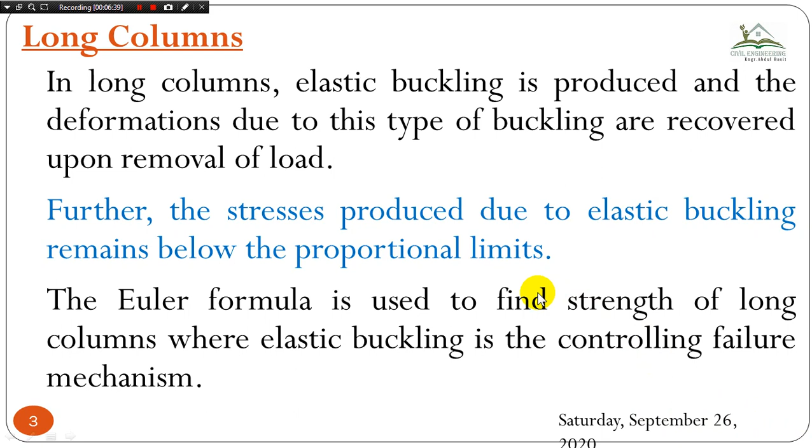Long columns are defined as those columns for which the slenderness ratio is greater than RC, as I've told you. And this is phi, the factor included to determine the compressive strength. Now short columns refer to columns having a slenderness ratio less than 20 to 30. There are zero buckling chances in short columns; only yield stress will govern.

In practice very few columns meet this condition. Normally very few columns will be short; they will usually be intermediate or long. For intermediate columns the slenderness ratio is above 30 up to 133. And long columns I've already explained.

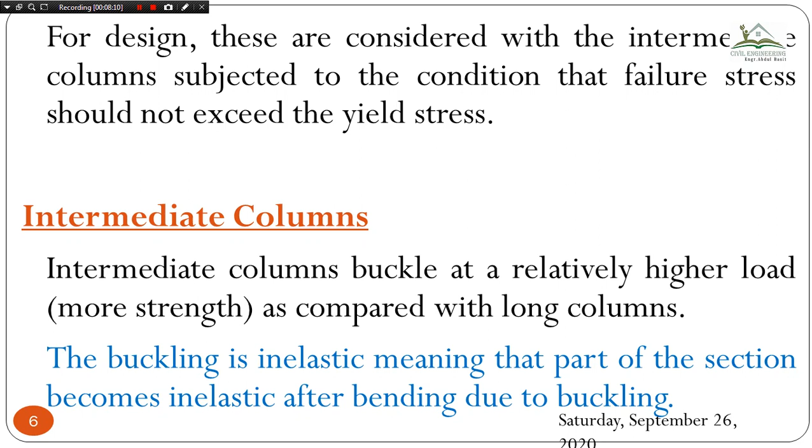Now coming to the column strength formula. We have already discussed the tensile strength, where phi t Tn was the design strength and Tn was equal to Fy into Ag. Similarly here is the same formula, just the variables changed. Instead of Tn we use Pn, for compressive load, the compressive nominal strength, and phi c is the strength reduction factor for the LRFD design method.

For the ASD design method, phi c is replaced with another factor of safety, omega c, and Pn will remain the same.

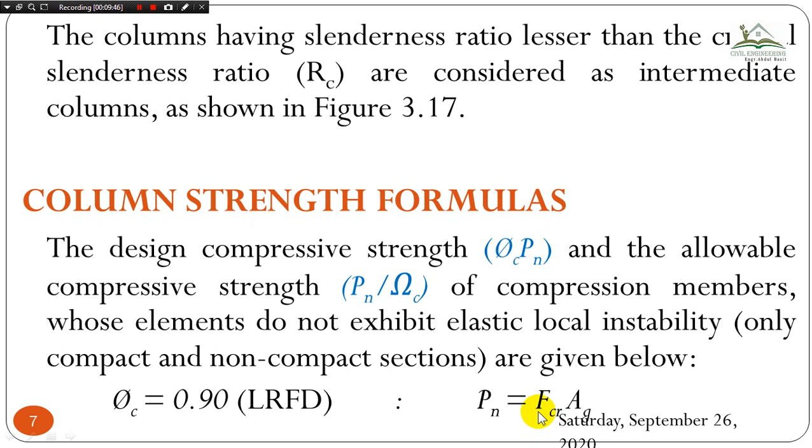Here omega is equal to 1.67 according to ASD, and Pn is equal to Fcr Ag, so Pn remains the same in both LRFD and ASD. F critical is the critical or ultimate compressive strength based on the limit state of flexural buckling, determined as under.

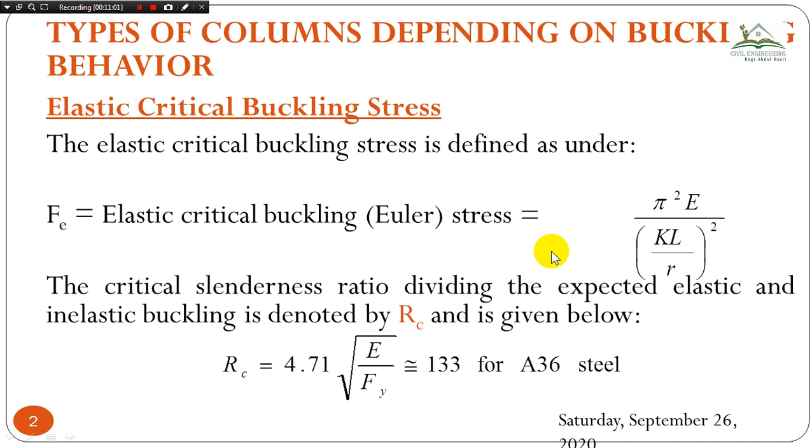How to determine this F critical.

So sometimes it will be equal to 0.877 Fe for elastic buckling, okay, and for inelastic buckling, or if there is no buckling, then we will use F critical equal to 0.658 to the power Fy divided by Fe, multiplied by Fy, okay.

All the values are given with you. So how to find out whether this buckling is elastic or inelastic? Here we have two conditions, okay. Either this condition will be acceptable for this calculation, or this condition will be satisfied. Similarly, either this condition will be satisfied or this condition will be satisfied, then this equation will be acceptable to you. So here it is.

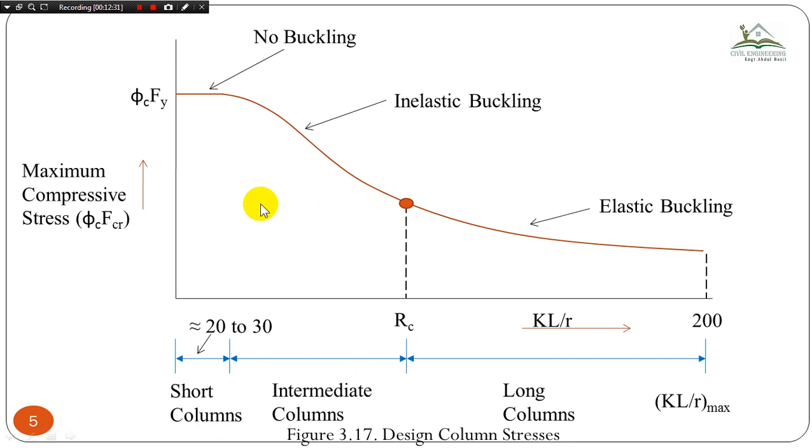What does this condition mean? KL divided by R, this is the slenderness ratio, and this is greater than RC, okay. So definitely we are in the long columns range. Here is that range, after this RC toward this point. So whenever the point of your column lies in this area, then it will be elastic buckling, and before this point it will be inelastic buckling, okay.

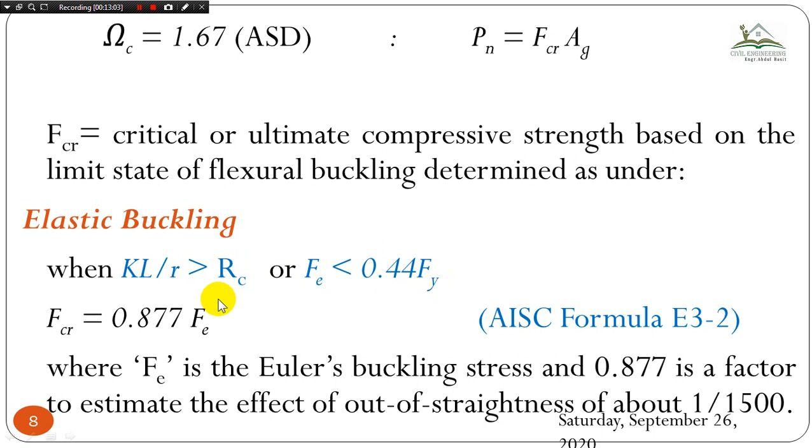So here it is, for elastic buckling, or Fe is less than 0.44 Fy. So again 0.44 Fy, not equal to 1 Fy, okay, less than 0.44 Fy. So this will be the situation where you will use F critical equal to this thing.

And similarly, when slenderness ratio is less than or equal to RC, or 133 for A36 steel, or Fe is greater than this thing, okay, then you have to use this formula. All the terms given in this formula are clear to you people, as we have discussed in the previous tutorial.

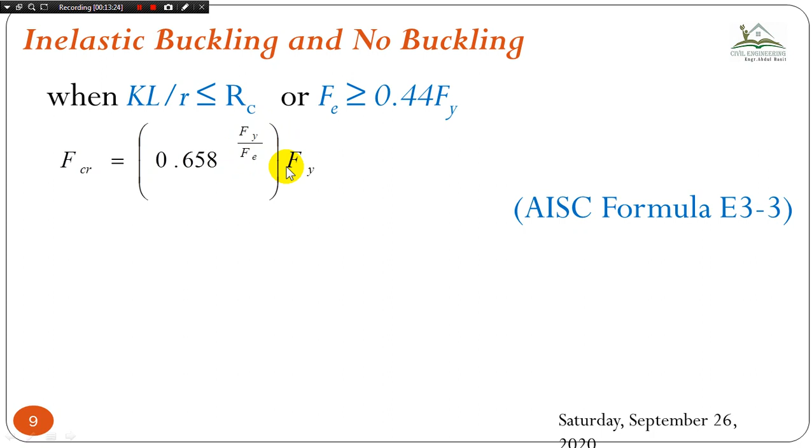Now coming to types of columns, okay, sections for local stability. So already we have discussed in the previous tutorial local stability phenomena and overall instability phenomena. So let me repeat it for you.

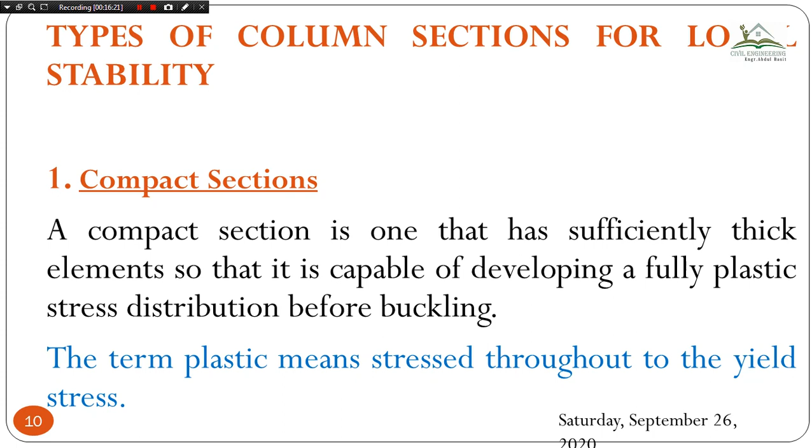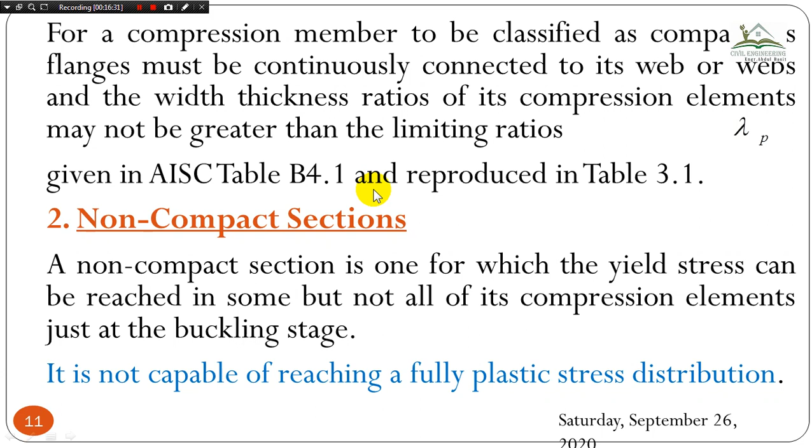So b divided by t is the width to thickness ratio, and lambda p values are given in tables 3.1 and b4.1. For non-compact sections, these are defined as sections which have width-thickness ratio greater than lambda p but not greater than lambda r, meaning it is between lambda p and lambda r. The limiting value lambda r and kc are also given in the table.

So first, let me talk about lambda p. Lambda p is equal to 1.12 times the square root of e divided by fy. So you have to determine the lambda p value from this equation for the type of steel you are given. For A36 steel, this is 31.8. You have to keep this in mind.

Similarly, lambda r for different situations is given in the table, along with b divided by t. For a compact section, b divided by t should be less than lambda p. For a non-compact section, it is between lambda p and lambda r, and for a slender compression section it is greater than lambda r. The values for lambda r are given here.

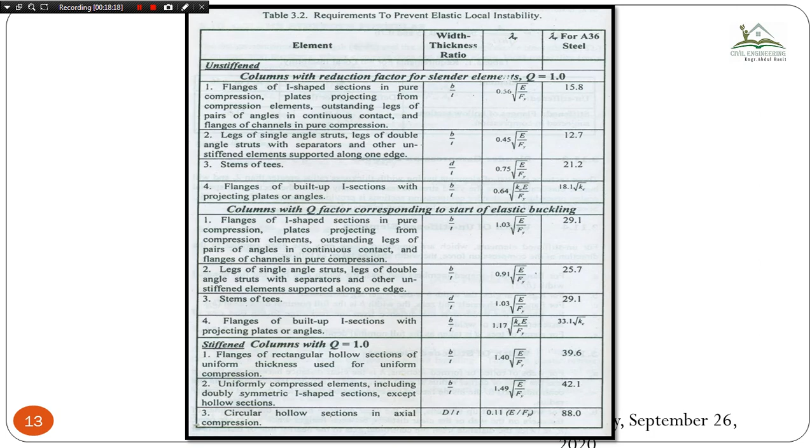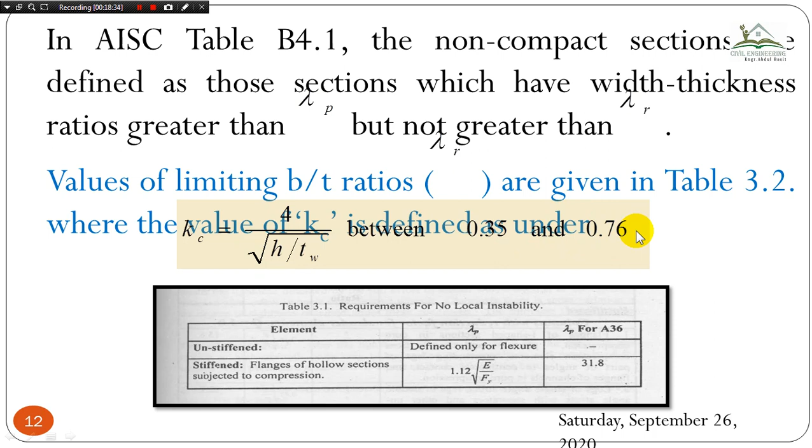The value of kc is also required for this section, for flange or built-up I section with projecting plates or angles. This is 0.64 times the square root of kc times e divided by fy. You are already aware how to determine e and fy and where to get them. The kc value is given in this equation: kc equals 4 divided by the square root of h divided by tw, between 0.35 and 0.76. Here is table 3.2 again.

Now, slenderness ratio - slender compression section I've already talked about. Now, width of the unstiffened element: for that b divided by t ratio, we need to determine the width of the unstiffened element.

For unstiffened elements, the b divided by t value, this will vary accordingly, because unstiffened members can be different in different situations. For example, in an I-shaped member or T-shape, where we have a flange on top, half of the flange is free, and on the other side again half of the flange is free. So b will be equal to bf divided by 2, because half of the flange is unstiffened, not the whole flange. Unlike a channel section, where all the flange width is free - there is no connection between the flanges, so the whole width of the flange is unstiffened, and then the width will be equal to bf.

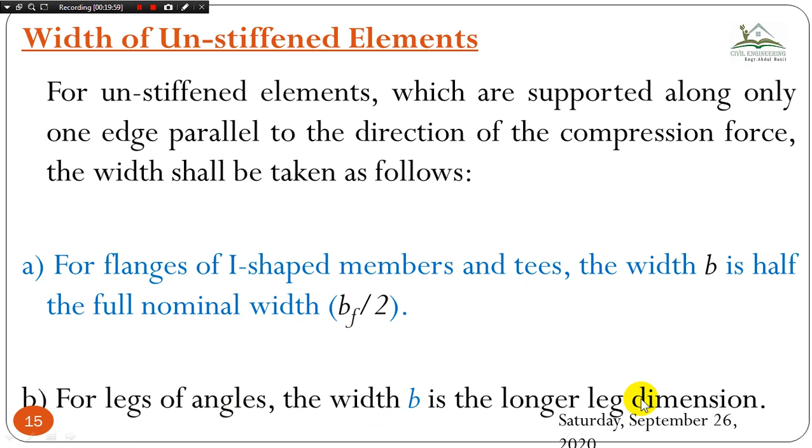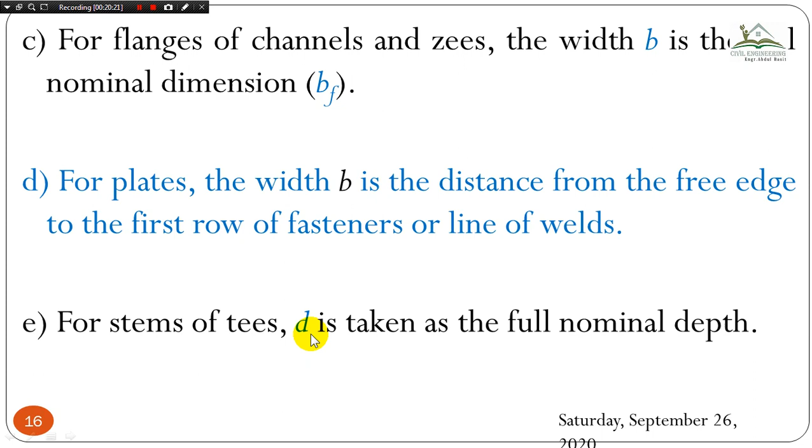For legs of angles, b will be equal to the longer leg. For flanges of channels and z's, the width will be equal to bf, same as I've told you. For plates, the width will be equal to the distance from the edge to the first row of fasteners. For the stem of a T, b will be equal to d, the nominal depth.

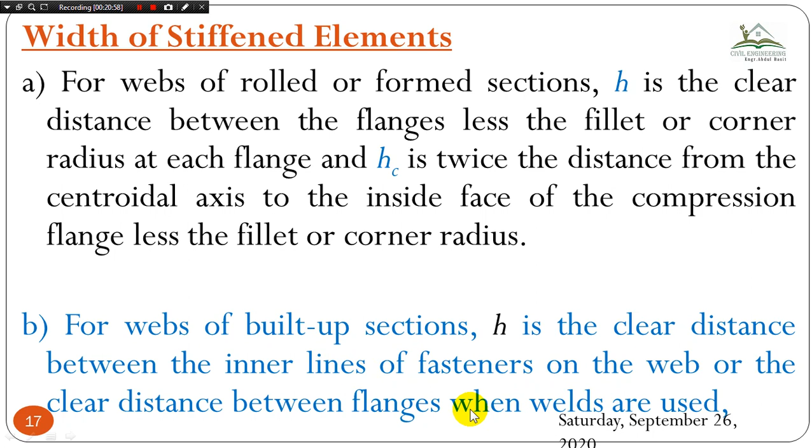Now talking about the width of stiffened members. A stiffened element of the member refers to the web in the I-shape or W section, where h is the clear distance between the flanges, less the fillet or corner radius. So hc will be equal to the depth of the web. For web of built-up shapes, h is the clear distance between the inner lines of fasteners, and hc is twice the distance from the centroidal axis to the nearest line of fasteners.

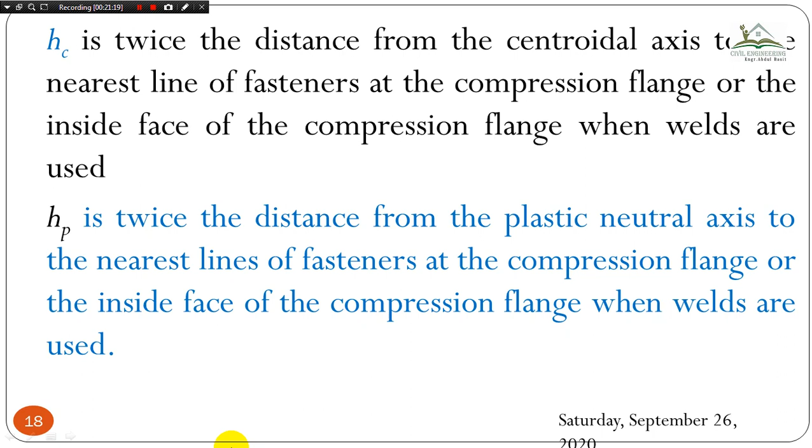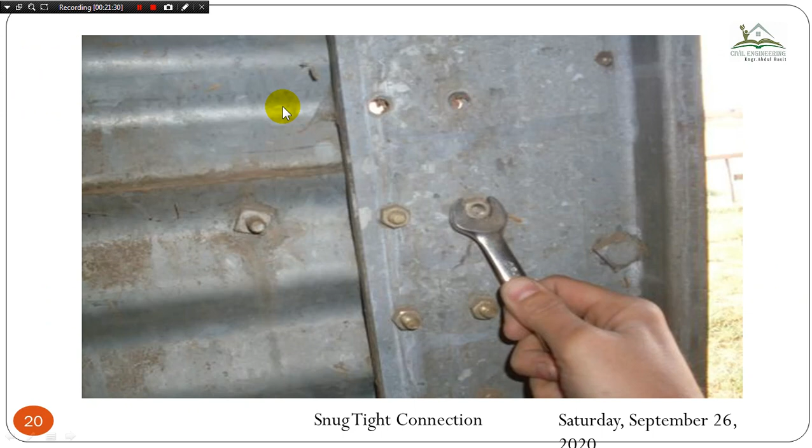Insha'Allah, in the next tutorial we will talk about the modified slenderness ratio - what is meant by snug tight connection and turn-of-nut connection - and then we will talk about the determination of the modified slenderness ratio. Thank you very much for watching.